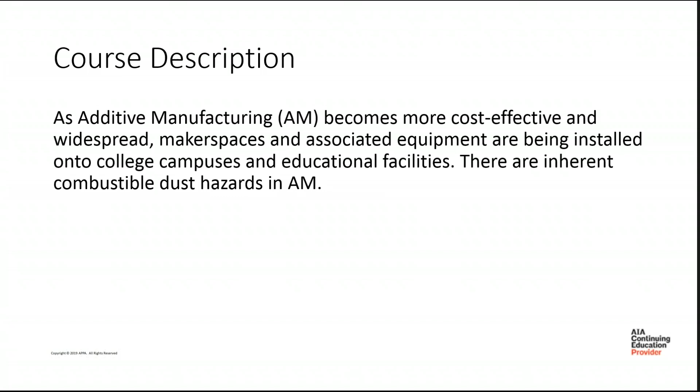Some of the learning objectives that we have: we're going to identify the 5 components of a combustible dust explosion. We'll help you understand building code requirements for additive manufacturing. We'll identify some of the unique fire and explosion hazards associated with additive manufacturing. We'll describe some of the design-based protection methods available for additive manufacturing, and then also some of the operation-based protection methods.

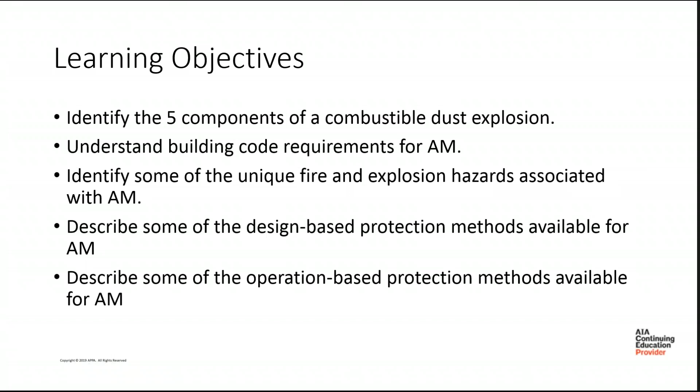To start, we'll define additive manufacturing. It's the process of joining materials to make parts from 3D model data, usually layer upon layer, as opposed to subtractive or formative manufacturing methodologies. There are other terms used: additive fabrication, freeform fabrication, additive techniques, additive layer manufacturing, sometimes used interchangeably with additive manufacturing.

AM machines have a lot of benefits. They don't require expert machinists to actually make a part, and it's typically much quicker to make a part. If you're doing research and development, you can actively test multiple different prototypes in the time it would typically take to make one prototype. There are many other benefits to them.

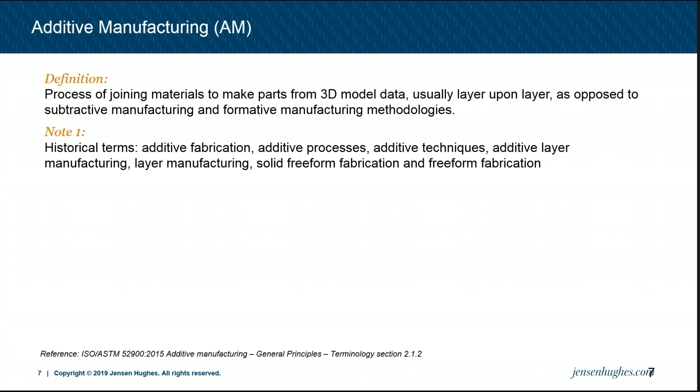Types of additive manufacturing machines. There are a number of different types: vat photopolymerization, material jetting, binder jetting, material extrusion, sheet lamination, directed energy deposition, and the one we'll be focusing on today is powder bed fusion. Within powder bed fusion, there are a number of different methods: direct metal laser sintering, electron beam melting, selective heat sintering, selective laser melting, and selective laser sintering.

These can use metal powders - aluminum, titanium, chromium are some examples. Many of these are combustible dusts. You can also use powdered plastics, but what we'll be focusing on today is metal dust.

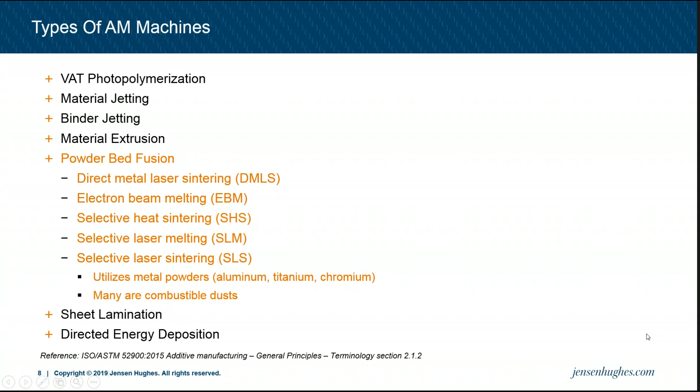Here is a brief example of laser sintering. You have a powder delivery system. On the left side of this orange line is the additive manufacturing machine setup. You have bulk powder on one side. It's slowly pushed up by a delivery piston, and a roller will take that powder over to the fabrication side, depositing a thin layer on that side.

Once there, you'll have, in this case, a laser beam that will sinter the powdered particles, joining them together, based on the 3D model. Once that layer is completely finished, the delivery piston will move up, the roller will put another layer of powder down, and you'll repeat what you just did. You'll do that for many, many layers until you finally have a finished product.

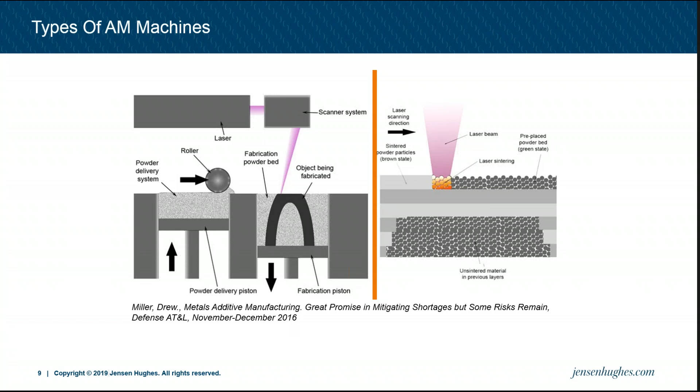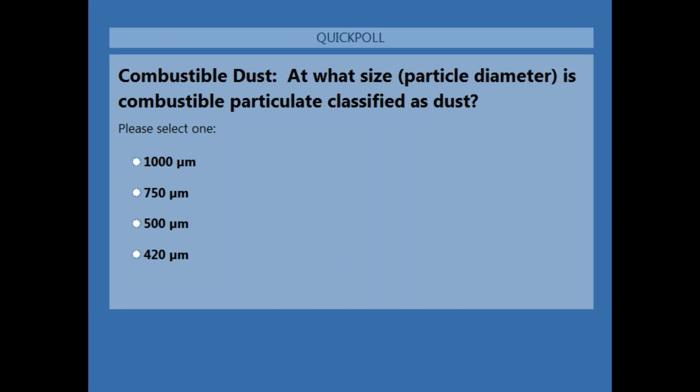Here's our first question. Combustible dust: at what particle diameter is combustible particulate classified as dust? Please take a second, put down A, B, C, or D. A is 1,000 microns, B is 750 microns, C is 500 microns, and D is 420 microns. I'll give you a hint - it used to be one answer and now it's another, and they're relatively close in size. I'll give you 5 seconds here.

19% said 1,000, 14% said 750, 43% said 500, 24% said 420.

The definition of combustible dust is a finely divided combustible particulate solid that presents a flash fire hazard or explosion hazard when suspended in air or another oxidizing medium. Dust was traditionally defined as material 420 microns or smaller, but for consistency with many standards out there, 500 microns is now the appropriate size criteria. To give you some perspective, ordinary granulated sugar is about 75% sub 420 microns. Metal powders used in additive manufacturing typically meet this criteria.

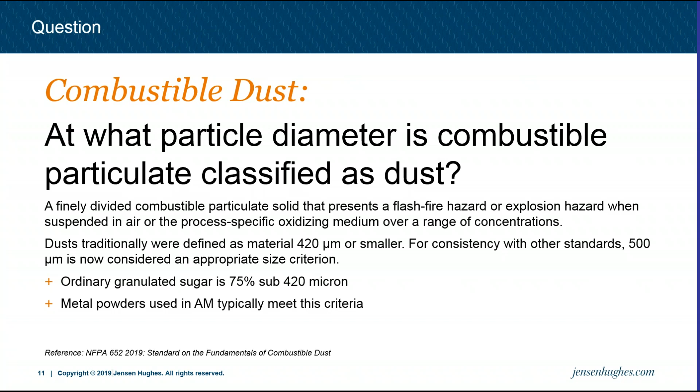So, components of a combustible dust explosion - we'll build up to the explosion part, starting with a fire hazard. A fire hazard has 3 main components: fuel, which is your metal powder or metal dust; an ignition source, which could be multiple things - electrostatic discharge, electrical, or the laser in the actual equipment; and oxygen.

A deflagration hazard has all of those 3 components that a fire hazard has, plus you have dispersion - the dust dispersed and suspended in air or an oxidizing medium. An explosion hazard is a deflagration hazard, but now confined. So you have the fuel (metal dust), an ignition source, oxygen, dispersion, and it's enclosed in a vessel.

An explosion hazard is the potential for a rupture of a closed vessel. A fire hazard would be when you have a layer of powder on the ground and it's ignited. A deflagration hazard is a dust cloud dispersed in air, however it's not within a vessel, and then you could have a deflagration.

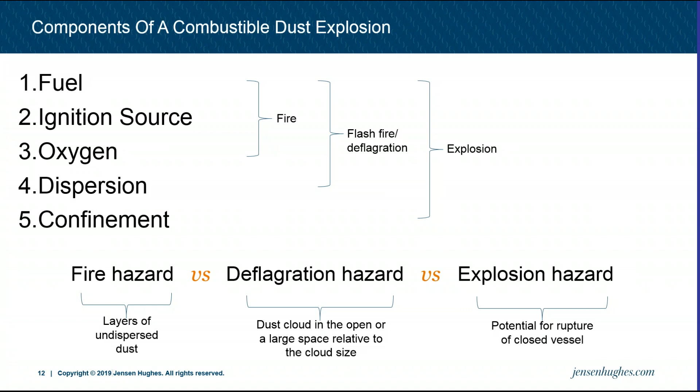Flash fire and deflagration are kind of used interchangeably in industry. Just to give you a baseline, they do have different definitions according to NFPA codes. A flash fire is a fire that spreads by means of a flame front rapidly through a fuel such as dust, gas, or the vapors of an ignitable liquid without the production of damaging pressure. Similarly, deflagration is the propagation of a combustion zone at a velocity less than the speed of sound. An explosion is the bursting or rupture of an enclosure or container due to the development of internal pressure from a deflagration.

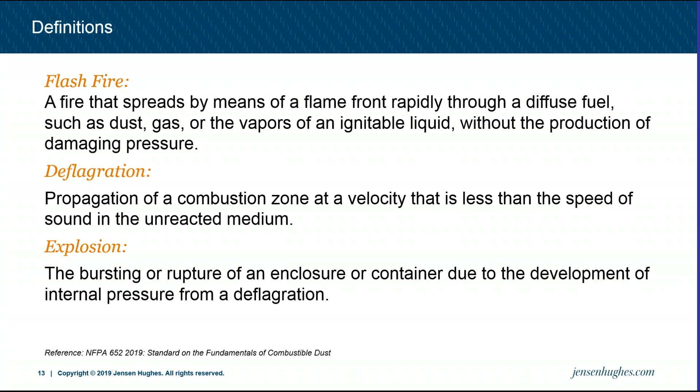Another question, and Billy will put up this poll for you guys as well. For building codes, how much combustible dust can I use or store based on the IBC 2018? A is 100 pounds, B is 50 pounds, C is 20 pounds, D, the value is not specified.

This is in reference to table 307 of the IBC, and it has to do with maximum allowable quantities, MAQs. So we'll take a few more seconds to finish up the poll and see what kind of answers we got back from everybody. 12% said 100 pounds, 25% said 50 pounds, 18% said 20 pounds, 45% said the value is not specified.

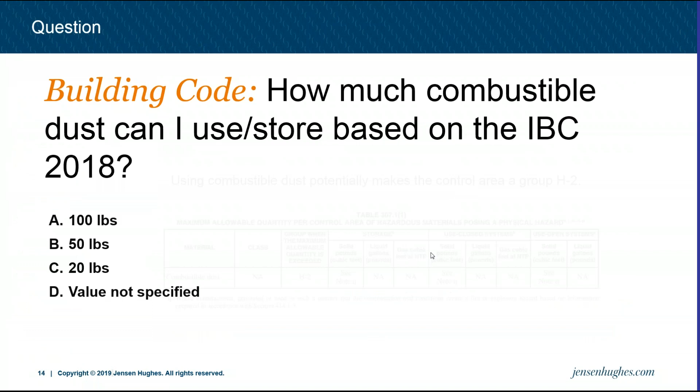Okay, so it is not specified. In that table 307.1(1) for combustible dust, it says see note Q. Well, what is note Q? It says where manufactured, generated, or used in such a manner that the concentration and conditions create a fire or explosion hazard based on information prepared in accordance with section 414.

So what you will want to do is prepare information according to section 414. And what 414.1.3 really says is that you should do a dust hazard analysis. We'll touch on that later in this presentation.

What is a dust hazard analysis and what does it consist of? The dust hazard analysis report shall be prepared by a qualified person, firm, or corporation approved by the building official and provided without charge to the enforcing agency.

So if you do not prepare that report for the AHJ, you don't account for fire and or explosion hazards, then the occupancy would be a group H2.

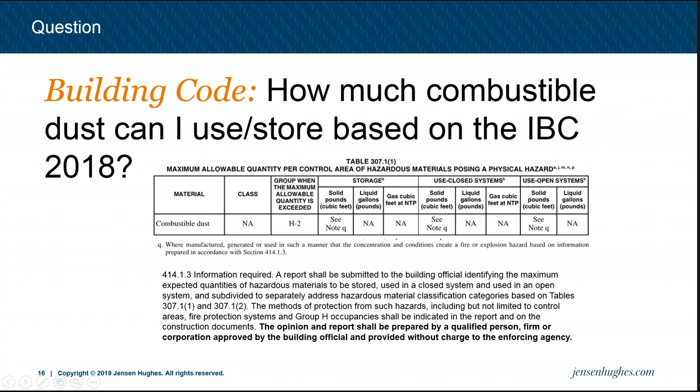You also need to account for water reactivity. For dusts that are water reactive, such as titanium, that's class 2, if storing more than 50 pounds in your maker space or adjacent to your maker space, that occupancy would be an H3.

With a water reactive dust, sprinklers are not allowed. And depending on local codes and the AHJ, an approved automatic fire detection system might be used.

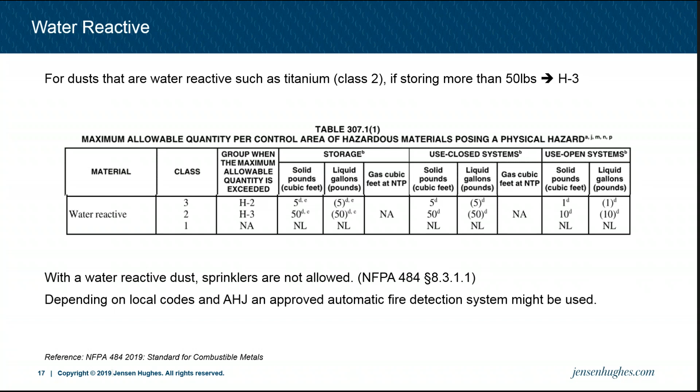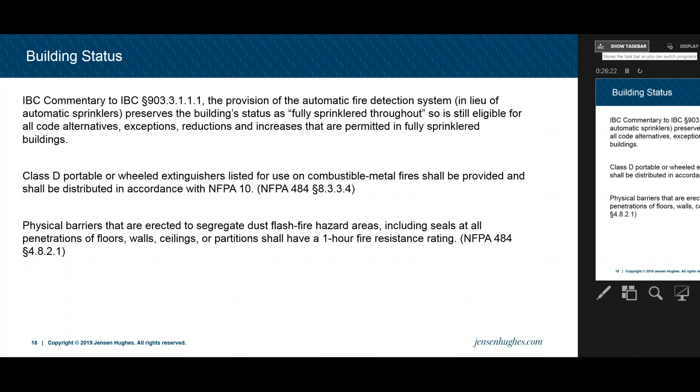So if you want a fully sprinklered building, but you can't put sprinklers where you have a maker space because you have water reactives, what do you do? Well, the IBC addresses that. The provision of an automatic fire detection system preserves the building status as fully sprinklered throughout, so it is still eligible for all code alternatives, exceptions, reductions, and increases that are permitted in fully sprinklered buildings.

You should have Class D portable or wheeled extinguishers listed for use on combustible metal fires. They shall be provided and distributed in accordance with NFPA 10.

Now, fire extinguishers on combustible metal fires should be used with caution. It's best to fight an incipient fire by ringing it with a dam of dry sand or dry material that will not react with the metal being extinguished.

Application of a dry extinguishing agent shall be conducted in such a manner as to avoid any disturbance of the combustible metal dust, which could cause a dust cloud. So if you take a fire extinguisher and aim it very close right to the center of that fire, what you could end up doing is creating a flash fire hazard, and that's a greater hazard than what you started with.

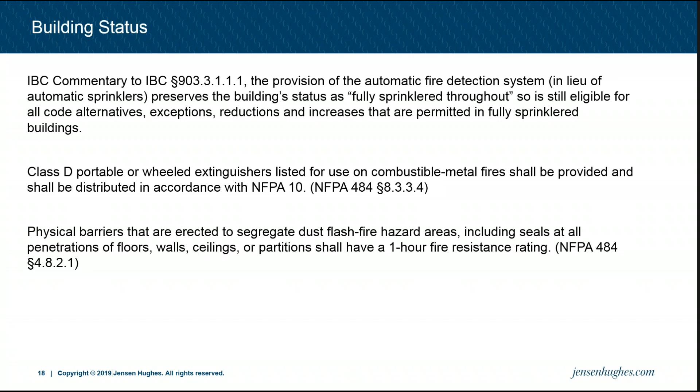So the application of fire extinguishers, you should really conduct training on that, and you should do it so as to not disturb or spread the combustible metal powder. And then one more item there is the physical barriers. So if you have a dust flash fire hazard area, you should have a 1-hour fire resistance rating.

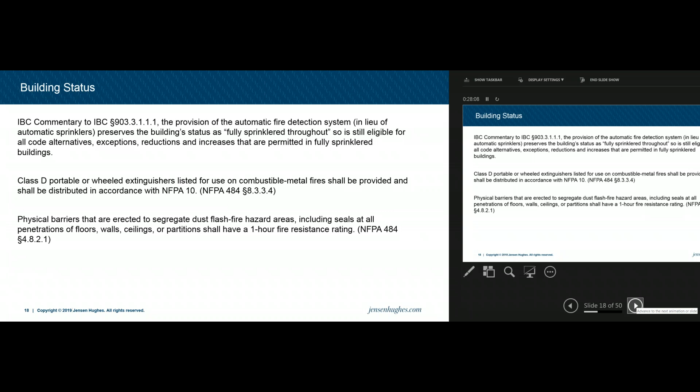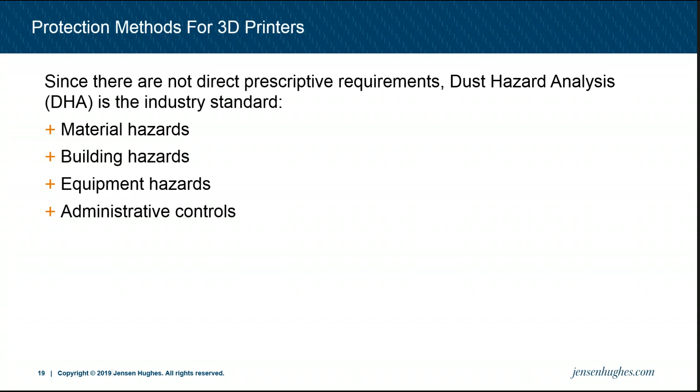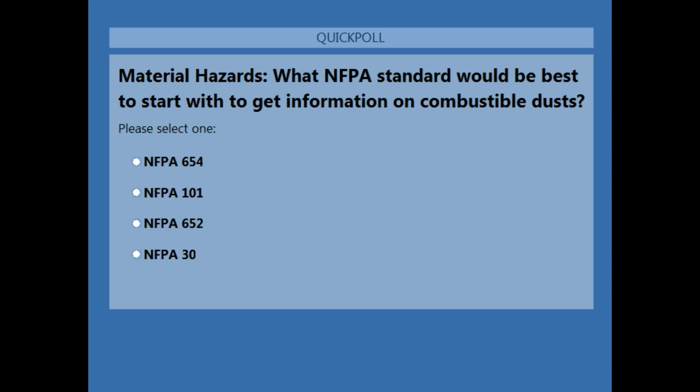Poll results: NFPA 654 at 22%, NFPA 101 at 7%, NFPA 652 at 58%, NFPA 30 at 13%.

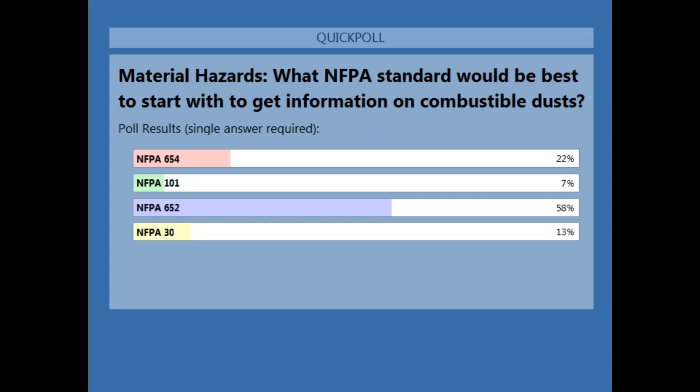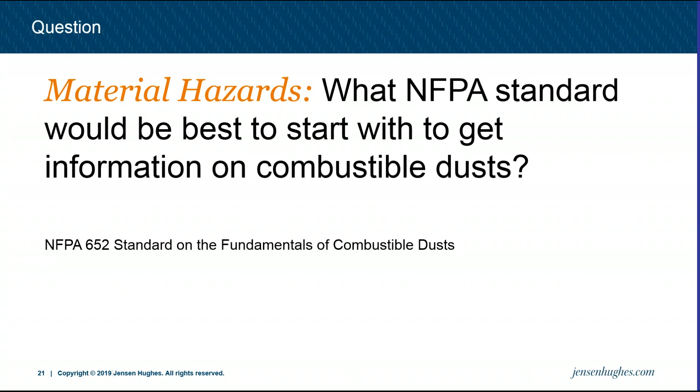NFPA 652, Standard on the Fundamentals of Combustible Dust, is the go-to standard, and from there it will direct you towards other combustible dust standards. There are a number of them out there. NFPA 652 is NFPA's attempt to consolidate all the different combustible dust standards.

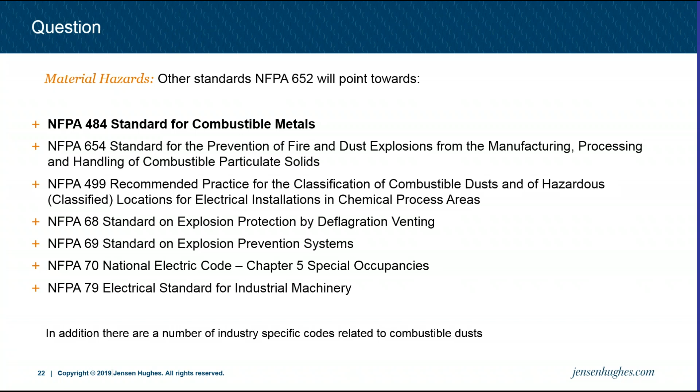NFPA 484 is the standard for combustible metals. You'll hear me cite that throughout this presentation. It has a section devoted to additive manufacturing. NFPA 654 is another good one. NFPA 499 is good for hazardous area classifications. NFPA 68 is the standard on explosion venting. NFPA 69 is the standard on explosion prevention systems. Additive manufacturing machines often will have explosion prevention systems, and they should be compliant with NFPA 69, as we'll discuss later. NFPA 70 is the NEC, and NFPA 79 is the electrical standard for industrial machinery.

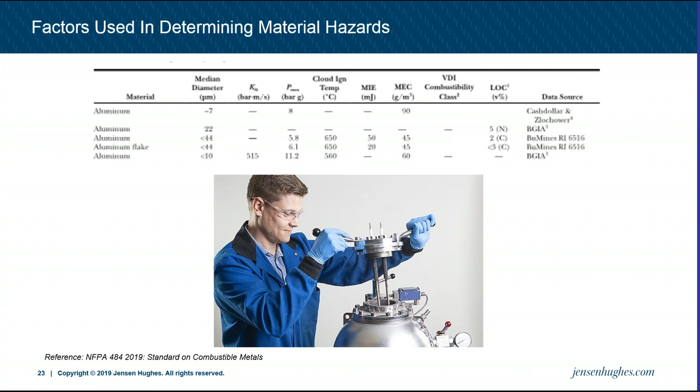So we'll use the material hazards to work through the building hazards and equipment hazards. For building hazards, you want to exercise ignition source control: have a hot work policy in place, a no smoking policy. You may also want to consider classified electrical equipment, and have electrostatic discharge controls in place. You also want to prevent hazardous fugitive dust conditions: have your equipment enclosed, dust tight, use small quantities of powder, and have a good housekeeping program. And then there are some HVAC considerations as well.

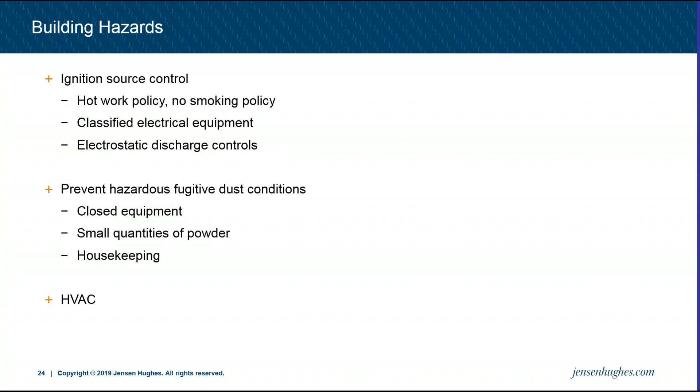Next question: classified electrical equipment. Where can I get more information about classified electrical equipment? NFPA 70, NFPA 499, NFPA 77, or NFPA 1. Take a couple seconds and choose A, B, C, or D. We're looking for electrical equipment, and there may be two right answers here in this case. Billy, if you want to close the polls, and we'll see what the audience chose.

Poll results: NFPA 70 at 77%, NFPA 499 at 8%, NFPA 77 at 15%, NFPA 1 at the remainder.

So NFPA 70 is your go-to. Article 500, hazardous locations. Class 2 locations are those that are hazardous because of the presence of combustible dust. Within this class 2 location, your metal dust would be classified as a group E.

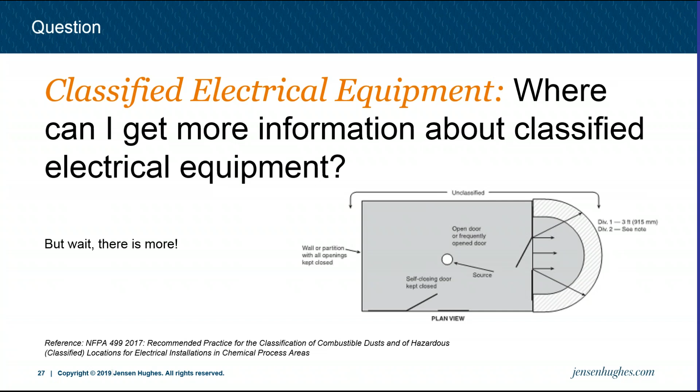Dust ignition proof, so this is your NEMA 9s. This protection technique shall be permitted for equipment in class 2, division 1 or 2 locations. Dust tight equipment is only approved for equipment in class 2, division 2 locations.

With classified electrical equipment, there will always be a T code. That's the temperature marking, which shall be less than the ignition temperature of the specific dust to be encountered. So if the ignition temperature of your dust is 200 degrees Celsius, you would not want to use electrical equipment that has a T code of T3, because it could reach 200 degrees C. You would want to use a T code that has a maximum temperature below that of your dust, so a T4, T5, etc.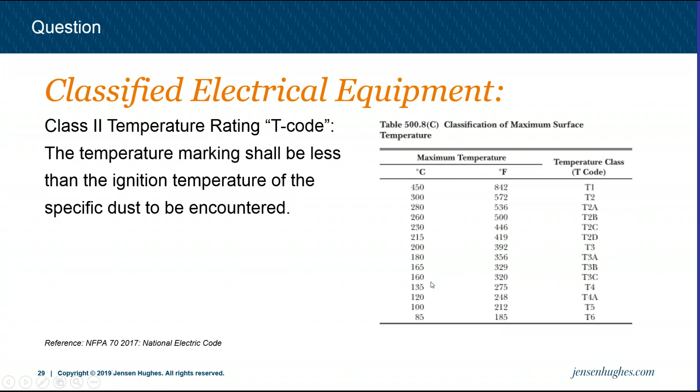And here, the cloud ignition temperature, you can see there. So if you get your dust tested and you find that your cloud ignition temperature and/or layer ignition temperature is X degrees Celsius, you'll want a T code that will not reach that number.

Static electricity, another important topic.

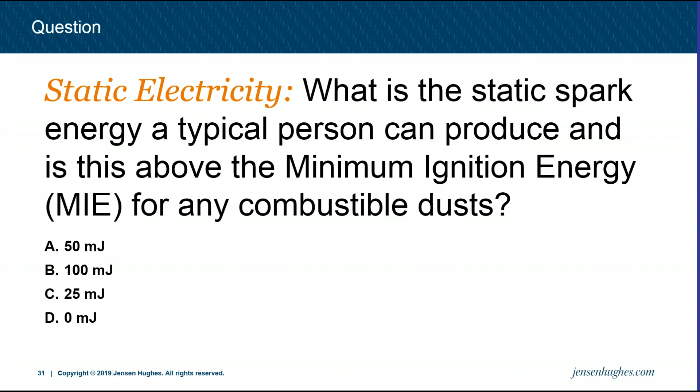What is the static spark energy a typical person can produce? And is this above the minimum ignition energy for any combustible dust? So we have a couple options there. If you're paying very close attention, you may already know the answer. A is 50 millijoules, B is 100 millijoules, C is 25 millijoules, and D is 0 millijoules. Take a brief moment and mark one of those down.

Let's close it and see what we came up with. Apologies, I forgot to unmute myself. 50 mJ got 33%, 100 got 34%, 25 got 33%, and no one said 0. Yeah, because everybody knows that they've sparked someone before when they rub their feet on the carpet or whatever it may be.

The maximum reasonable discharge energy from a person is estimated to be approximately 25 millijoules. So to put that in perspective to the dusts that are being handled, titanium powder has an MIE of 18 millijoules. And nanoparticles, which can be used in additive manufacturing machines, have MIEs less than 1 millijoule.

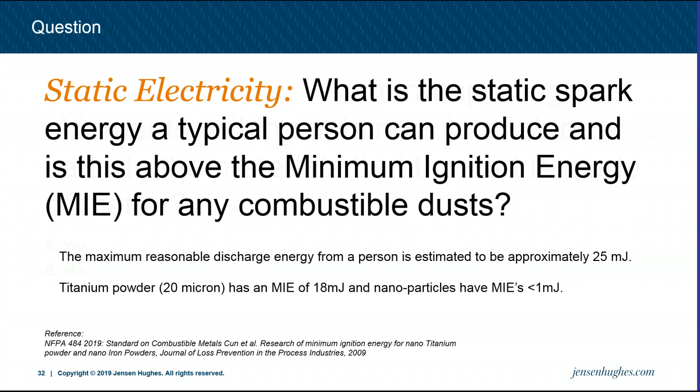Next question here, still about static electricity. We've got yes or no as the options here. This is the easy one. When transporting dust shipments within containers to a lab on a cart - someone goes out and gets them - do the materials that the cart is made of matter? Yes or no?

We'll give everyone a couple seconds here and then we'll close it and see what we come up with. Results showed the majority said yes, 8% said no. And they do matter.

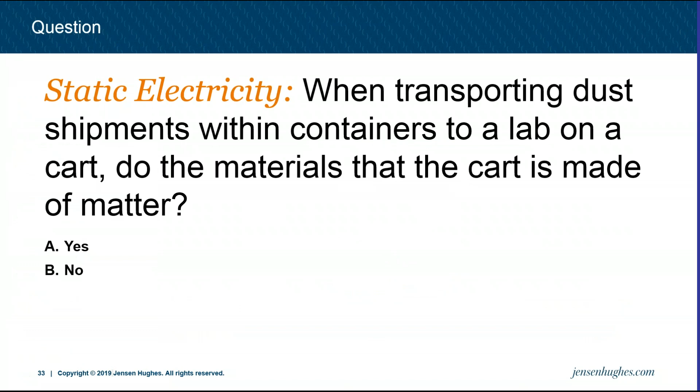Yes, for especially sensitive dusts, carts should be made of conductive material with non-static wheels to prevent static charge buildup and sparks.

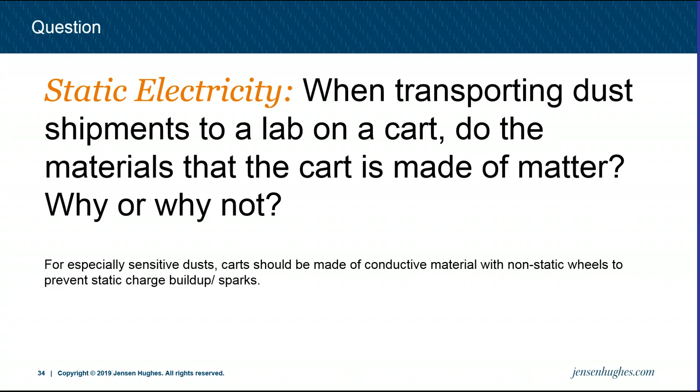So what does this mean for your design? You should have a dedicated grounding system for equipment. So every additive manufacturing machine, 3D printer that's handling combustible dust, combustible metal dust, should be connected to a dedicated grounding system.

Personnel may also need to stand on static dissipative mats and adhere to bonding and grounding requirements. That may mean static dissipative footwear, wrist straps to bond yourself to the actual 3D printer. Flammable storage cabinets must also be certified for storage of combustible materials and must be grounded as well to prevent static accumulation.

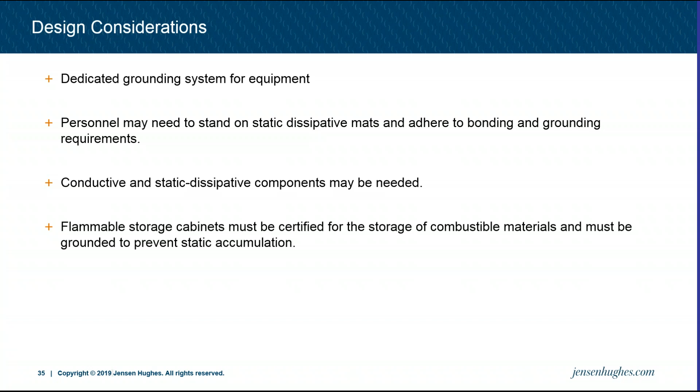Another important topic, housekeeping. Fugitive dust shall not be allowed to accumulate to a level that obscures the color of the surface beneath it. So if you have fugitive dust laying on a surface, you should be able to see what color that surface is below it. It's imperative to create a housekeeping plan and then also use appropriate methods.

So in this first picture, sweeping is going on, but you'll see a little bit of a dust cloud right in front of it. Sweeping is the preferred method for combustible dust, combustible metal dust, but you should do so in a manner that does not disturb the dust and create a dust cloud like you see in the picture.

The second picture is your typical shop vac, and shop vacs should not be used when collecting metal dust. The vacuum should carry some type of certification, UL, ATEX - you'll often see these as EX rated vacuums. They should only be used for small amounts of fugitive dust, and large spills should be gently swept up using conductive or non-sparking scoops. What you'll want to use is a natural fiber brush or broom.

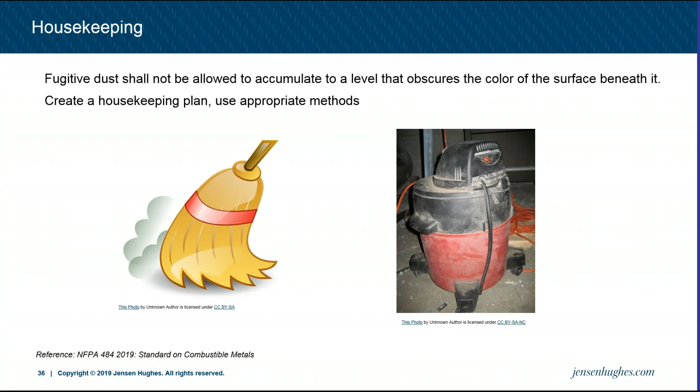A couple notes quickly on HVAC. The HVAC ductwork and associated equipment should be checked regularly for dust accumulations. For metal dust, it's not as much of a concern as, say, a less dense dust, but nonetheless should be checked. Makeup air for building heating or cooling shall have a dew point low enough to ensure that no free moisture can condense. That's critical for your water reactive metals.

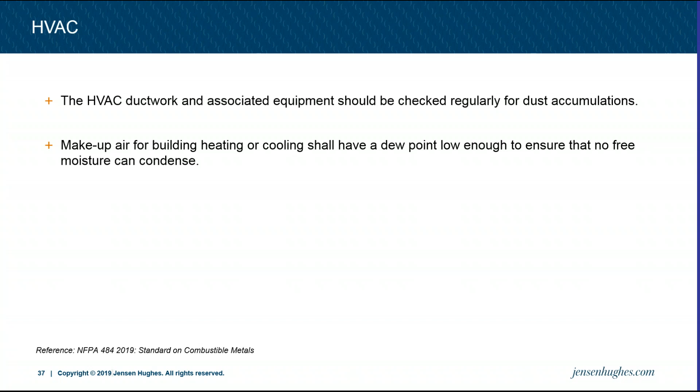A 3D printer, your AM machine, is a fire and explosion hazard. Hence why processes are typically done under an inert environment. It has all the elements there, and so if you take out the actual oxygen, then you don't have that explosion hazard and or fire hazard. So oxidant concentration must meet requirements of NFPA 69. That goes back to your material hazards and looking at your limiting oxidant concentration. That's what you get it tested for, so that you know the 3D printer or AM machine is operating below a level that ensures a degree of safety.

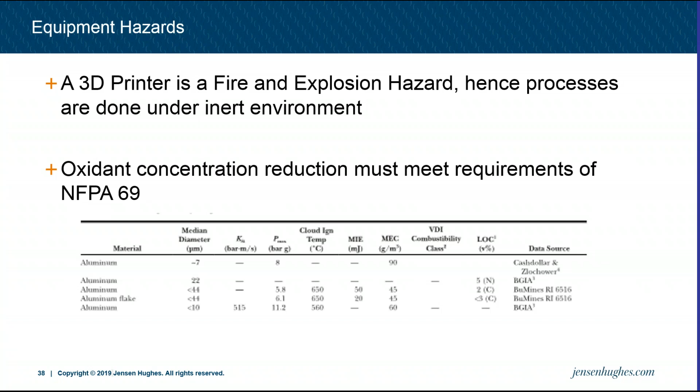Another consideration, since you are using inert gases within those 3D printers and machines, is that you may want to install oxygen monitoring in the actual room that it's contained in. Another consideration is if you're using argon, that's heavier than air, and you may want to consider low-level HVAC intakes.

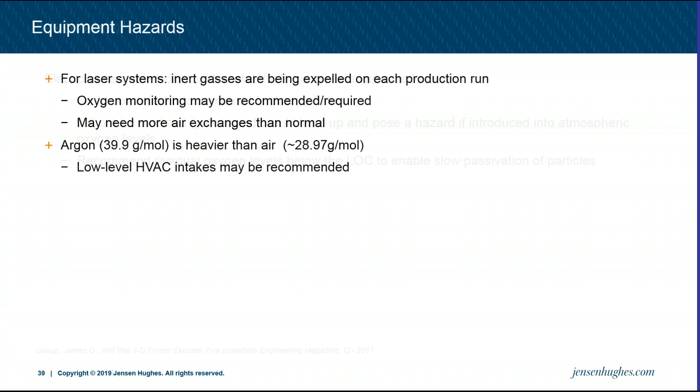Passivation - electron beam interaction with metal dust can create vaporized metal. This is especially true for air cleaners within your 3D printers and machines. Upon servicing these air cleaners, the dust accumulated on them is hazardous. So say you've got a filter inside your 3D printer, you open it up to clean it. When you open it up, you expose it to a lot of oxygen, and you could potentially create a hazard there.

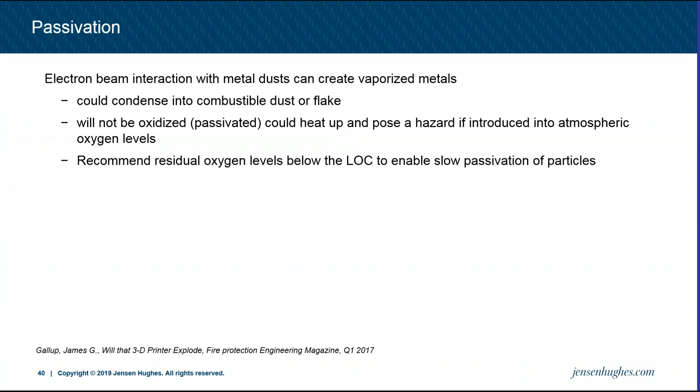So it's recommended that you have a residual oxygen level below the LOC to enable that slow passivation of particles. A small amount, a couple percent of oxygen within that equipment, will help when you actually have to perform maintenance on it.

Custom 3D printers. This is the face I make when I hear about custom 3D printers in a makerspace or lab. I have so many questions.

Originally, 3D printers and machines didn't have too many certifications with them. As of late, you can start seeing some UL ATEX certifications. Some other questions to ask for these custom 3D printers is, has the machine been reviewed for mechanical and electrical appropriateness? Does it meet electrical requirements? If you have a purged enclosure, it should meet NFPA 496. And does it meet the NFPA 69 requirements for oxidant concentration reduction?

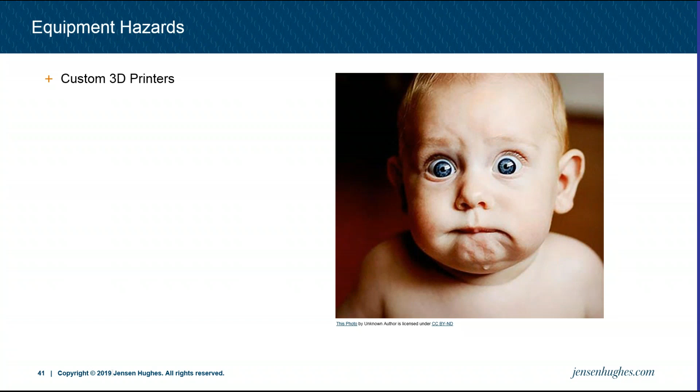So when a part is finished from a 3D printer or additive manufacturing machine, there's going to be some powder left over on it, maybe in internal cavities. That part should be gently rotated prior to its removal to allow that loose powder to be extracted. The part should be held in a position that minimizes the free fall distance from the part to the floor of the actual print chamber. You should use natural fiber brushes or conductive bonded and grounded tools to clean that part before putting it into, say, a blast cabinet.

The blast cabinet can change particle size and remove oxide layers and increase the explosibility of particles. If you have a dust collection system attached to that blast cabinet, you should have the appropriate precautions in place. That dust collection system should preferably go outside and have explosion protection and isolation.

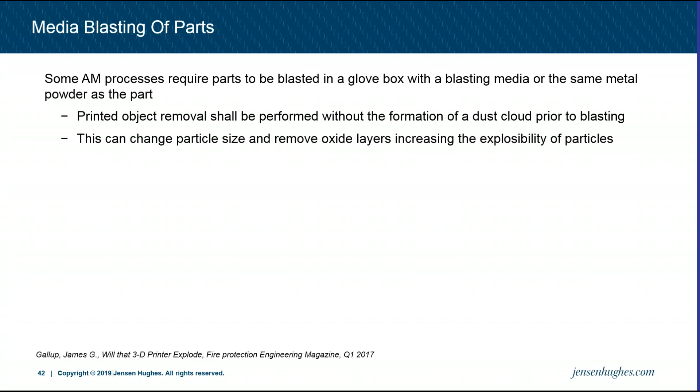Administrative controls. The first thing you can do is have a dust hazard analysis conducted. Internally, you could also do a JHA, job hazard analysis. You should have good work instructions for material handling and storage, a robust housekeeping policy, conduct inspection, testing, and maintenance, and have some management systems in place.

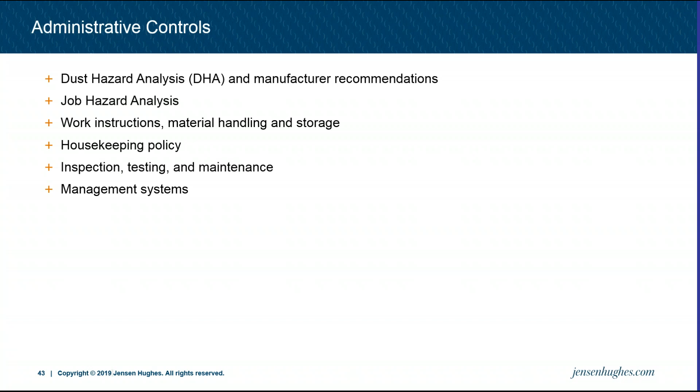Job hazard analysis may be required for operators of AM machines, staff, faculty, or students. NFPA 484 requires organizations working with metal dust to conduct and document a formal PPE assessment for employees working in areas where flash fire hazards exist. In that evaluation, you want to look at every task that's done, potential thermal hazards associated with that task, assign some qualitative risk, and then determine what PPE mitigation measures are needed to address that thermal hazard.

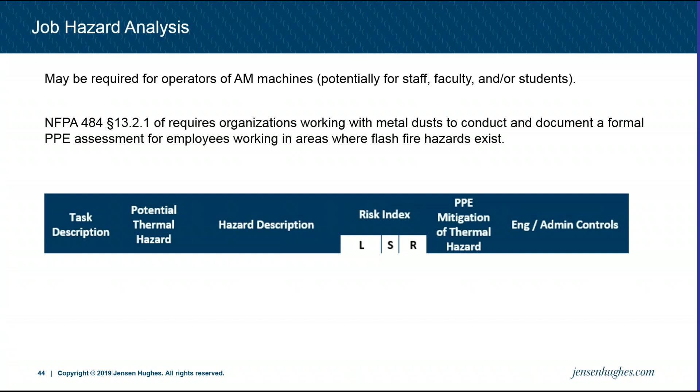Some PPE recommendations. There's recommendations for general health and safety, and then also combustible dust. For general health and safety, shoes should be slip resistant and safety toe protective. You want goggles rated for dust protection, Z87 D4 or D5 if you're working with very fine dust. You should conduct an industrial hygiene study to determine the appropriate respiratory protection, and then have material handling gloves.

Specifically for combustible dust hazards, your shoes should be anti-static or with conductive soles, using static dissipative floor mats. For hand and wrist protection, static dissipative gloves and wrist straps. And for your actual outer garments, they should be non-combustible or flame resistant, and also able to dissipate static electricity.

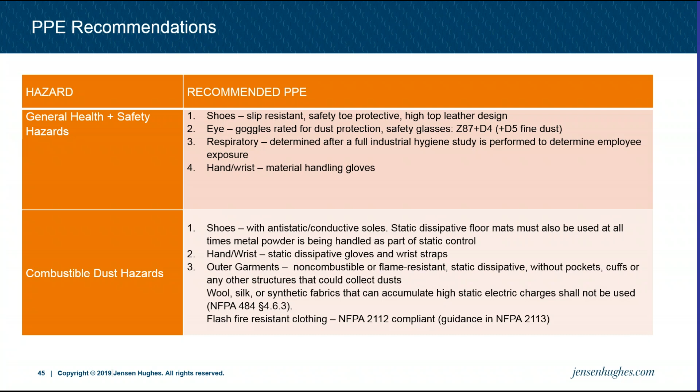Wool, silk, or synthetic fabrics should not be used when handling metal powders or metal dust. And if you choose to go with flash fire resistant clothing, reference NFPA 2112, and there's some guidance on how to choose the right flash fire resistant clothing in NFPA 2113.

You should have a formal training program for personnel involved with AM processes in the presence of combustible dust. NFPA 484 requires the employer to certify annually that the training and review have been completed. I'm not going to go through each one of these points, you guys can reference these afterwards. But especially in the collegiate environment, where you don't maybe have an employee working there for 10 years, it's critical to train everyone as they come in - training on evacuation of the work area, what hazards are there, and how to prevent those hazards from creating an incident, equipment operation, and the importance of housekeeping in minimizing fire and explosion hazards, and what the appropriate housekeeping methods are.

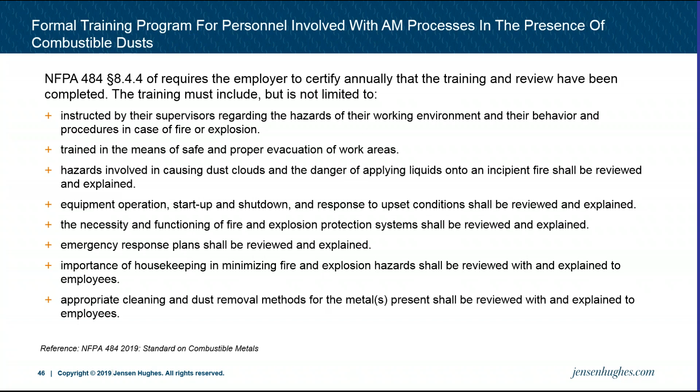Management of change. So per NFPA 484, written procedures shall be established and implemented to manage proposed changes to materials, technology, equipment, procedures, and facilities.

So you're in charge of a lab and you're using one metal powdered material, and now you want to use a new one. Well, you need to evaluate before bringing that new metal powder into the lab. You should evaluate it, get it tested, and put together a technical basis for the change. What safety and health implications are there? Maybe this new powder has a lower ignition temperature or a lower MIE. You need to consider whether the change is permanent or temporary, what modifications you would need to make, what training you would need to conduct, and then someone should authorize and own any changes made within that makerspace or lab.

Inspection, testing, and maintenance program. NFPA 484 recommends keeping all records of maintenance and repairs performed. The inspection, testing, and maintenance program, ITM for short, should include fire and explosion protection and prevention equipment - making sure that's working properly, your inerting system is working properly, interlocks in the event that you lose your inerting system so your equipment shuts down, all of that working properly. Any dust control equipment you have should regularly be inspected and maintenance performed on it.

Housekeeping checks should be done, making sure everybody's following the program, and identifying potential ignition sources - maybe it's electrical equipment, maybe the lab is a classified area and someone is bringing in their cell phone or other electrical equipment that's not rated for that environment.

A big one is a continuity check on grounding and bonding systems - a formal continuity inspection program that requires continuity checks on at least an annual basis, as well as any time equipment is moved, sits idle for an extended period, or has any preventative maintenance or repair done on it. That's critical. Also, resistivity testing of static dissipative footwear and conductive floors is required. Especially with footwear, you can get buildup on the bottom of it which will make it not perform as it was designed to. So you want to make sure, to prevent those electrostatic discharges, that you've got that bonding and grounding in place. So that's it in a nutshell.

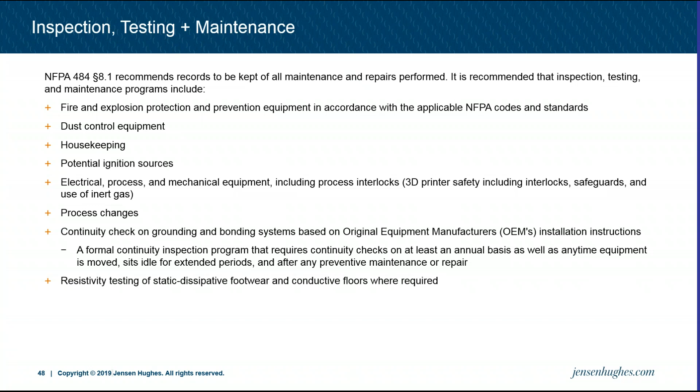We have a few questions that came in for you. Are there maximum and minimum explosive limits for combustible dust like there are for gases? That's a great question. The upper limit is not quantified for every material, as you would see for flammable liquids and flammable vapors.

There is a limit, but you typically don't see that as often with combustible dust, and it's not for every dust. Next question: why negative median D for aluminum?

Why? That was an approximate. So that wasn't a negative, it was just an approximate diameter.

This presentation addresses metal 3D printing. Are there any concerns facility managers should have for common plastic filament 3D printers in labs and offices? Yes. If that's coming in as a powdered material, plastics, depending on what it is, at a high level, could be considered a combustible dust. A lot of this would also apply to those plastic dusts as well, except for the water reactive part.